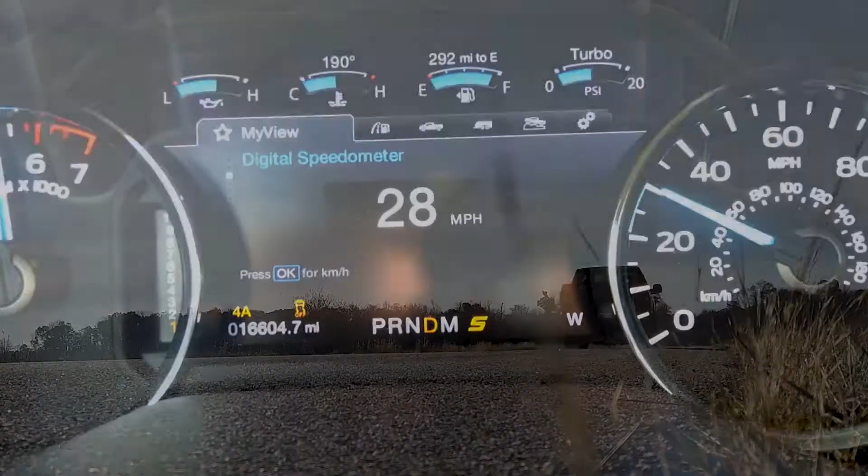Welcome back to the channel. Today we're going to finish the 360 camera mod in the truck. In part 1 and 2 we installed the front camera and the side mirror cameras. Today we're going to wire them all up and make them work.

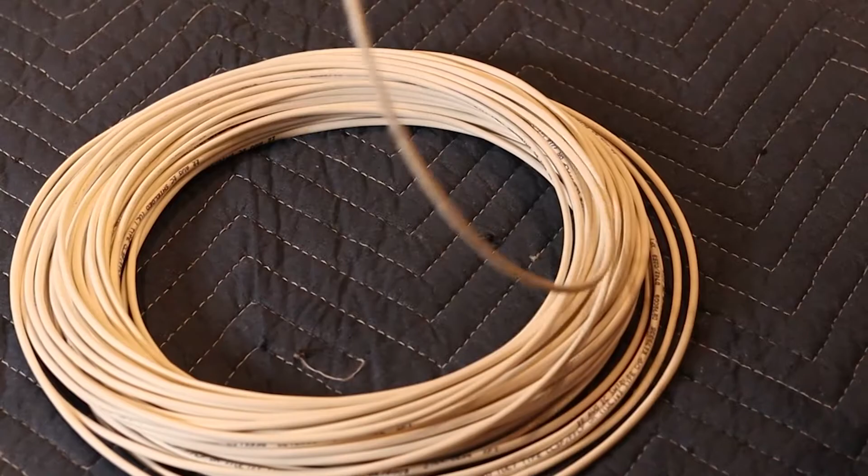We'll start by making the harness that goes inside the dash. Cut one 68-inch and two 58-inch pieces of shielded cable. This harness will connect the two side mirror cameras to the image processing module, or IPMB. It will also connect the front camera to the IPMB via a second wire harness. Under the hood, we will also be fabricating.

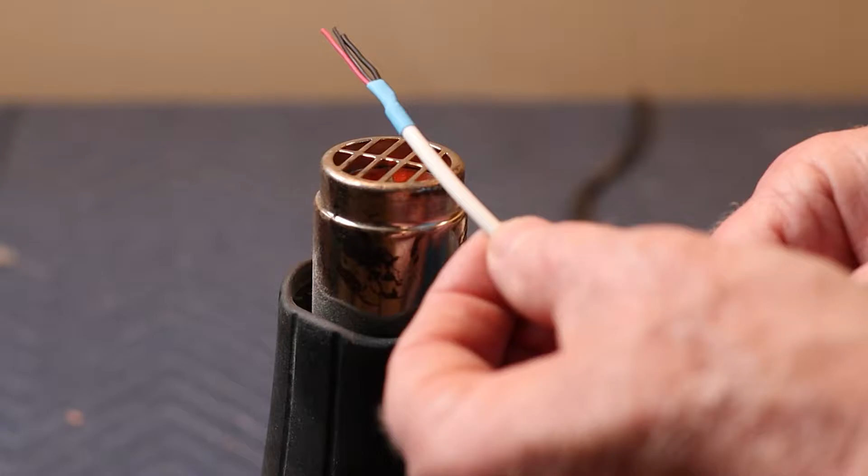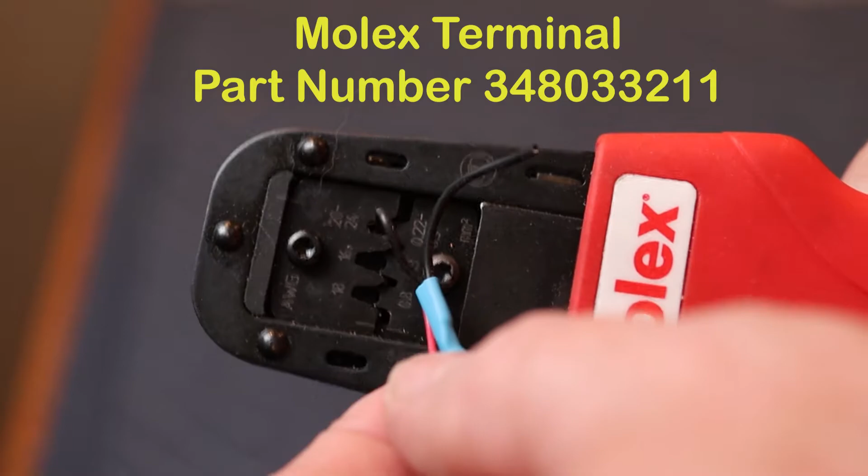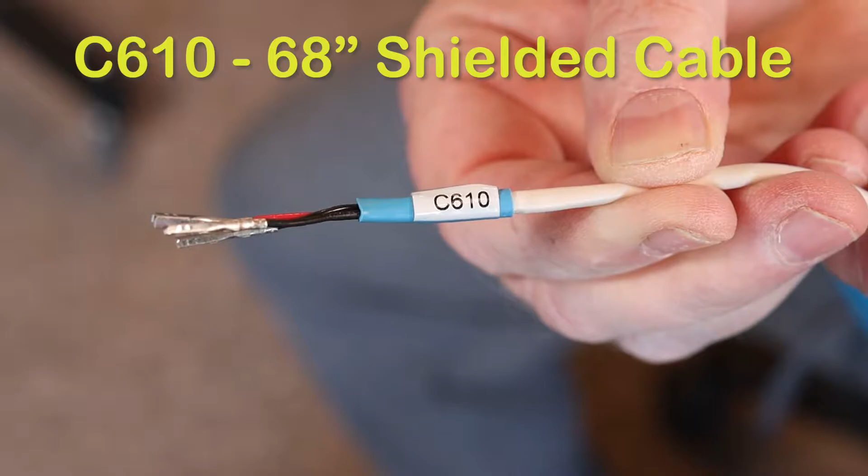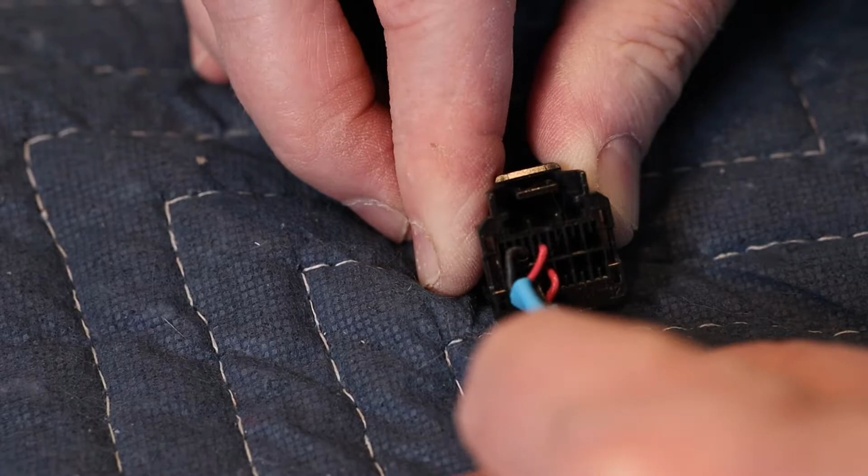Crimp one end of each cable with the terminals shown here. Mark both ends of one of the 58-inch cables C510. Now mark the 68-inch cable C610. And finally, the last 58-inch cable that will connect to the front camera harness, C211.

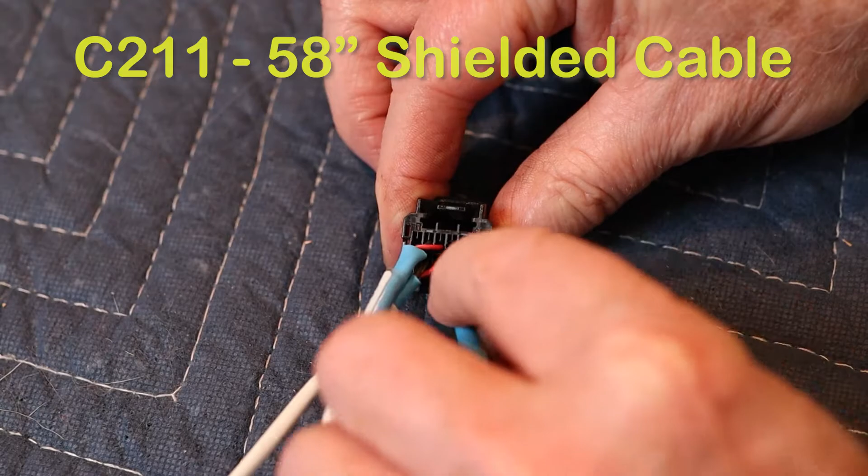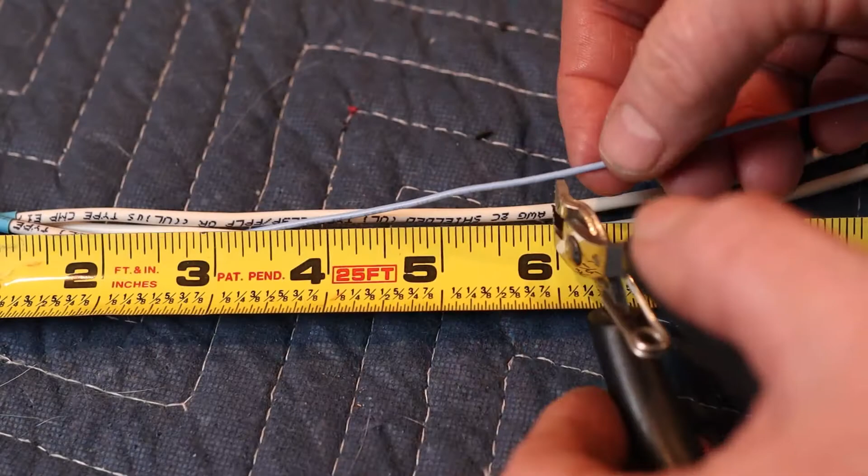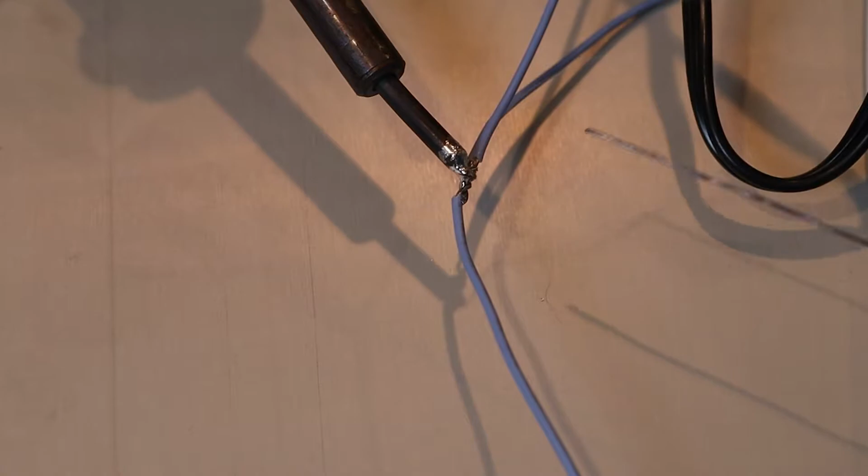Now add a wire that will provide power to both side camera mirrors. At about 6 inches from the connector, split the power wire to run to each mirror. At the opposite end of the cable, crimp each conductor and the shield, and also the two power wires with the terminals shown here.

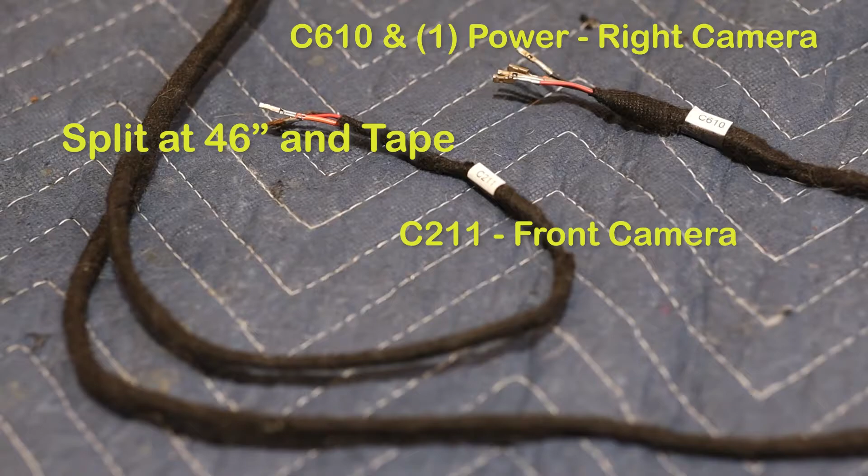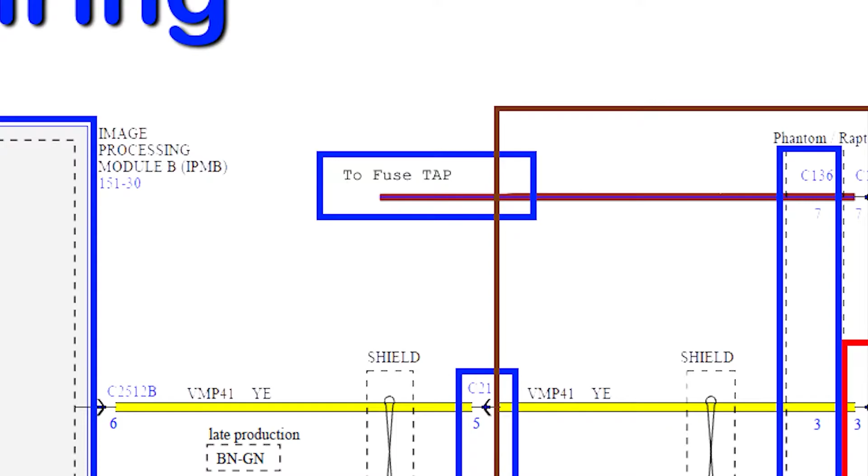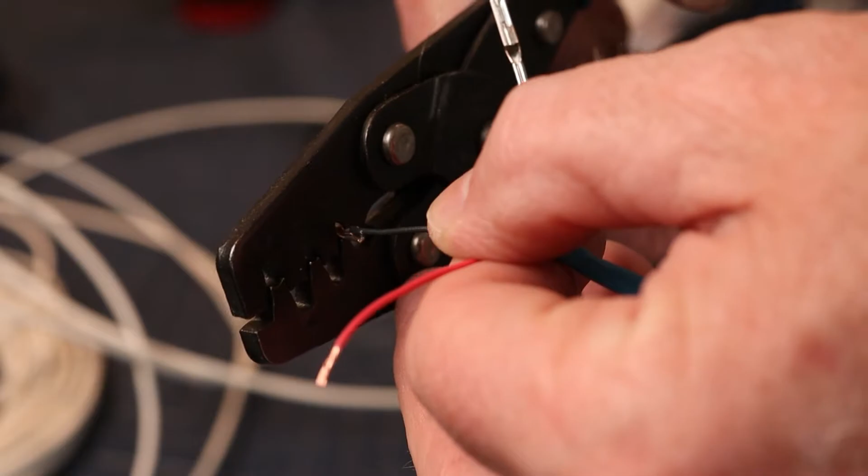My truck wasn't equipped from the factory with any front camera wiring under the hood. This harness will connect the front camera grille harness installed in part 1 to the harness we just finished. The light blue wire will provide power. The brown wire will provide the LIN signal to the camera.

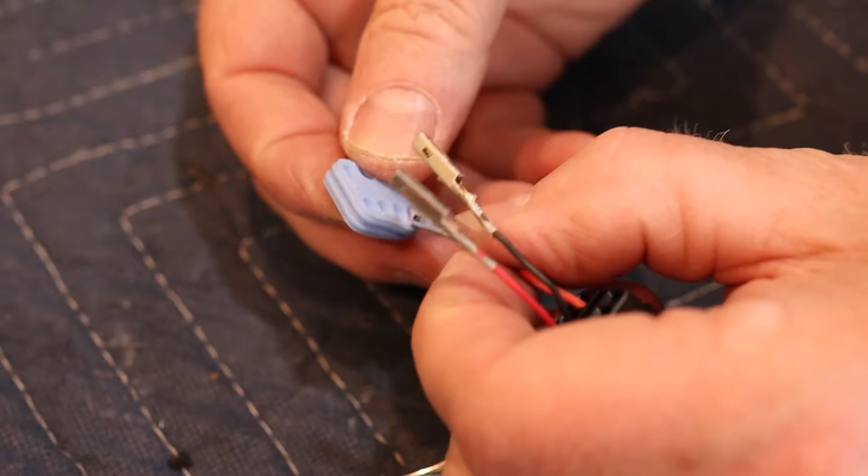Crimp the opposite end of the shielded cable with these pins. For now, we'll be using a fuse tap to provide power to the front camera. We may be revisiting this in the future.

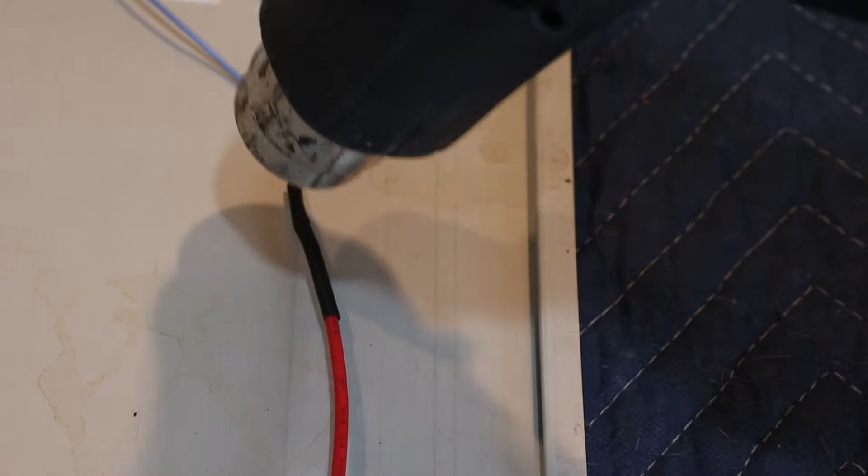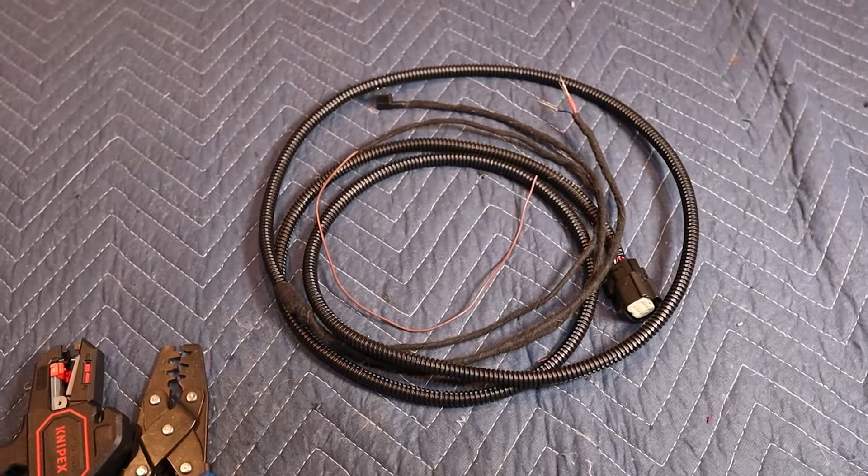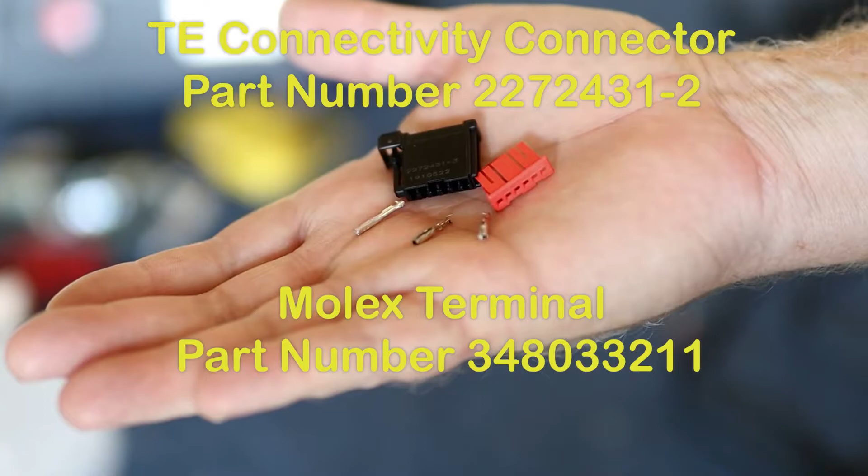Now we need to make a simple harness to connect the camera selector switch to the factory dash harness. Crimp this terminal on the gray wire opposite of the connector.

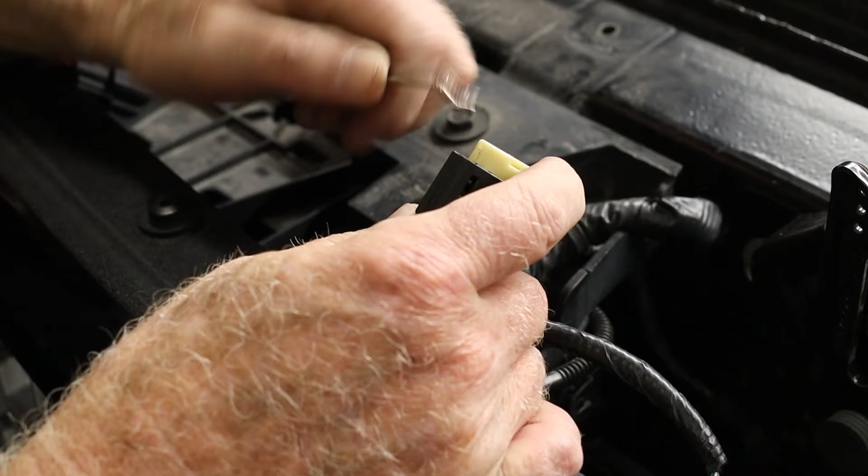Now we'll finally get started installing it in the truck. My truck has the ambient temperature sensor located in the grill, so we have to repin the sensor wires to the front camera harness. Later trucks will have the ambient sensor in the passenger side mirror. This won't be necessary on those trucks.

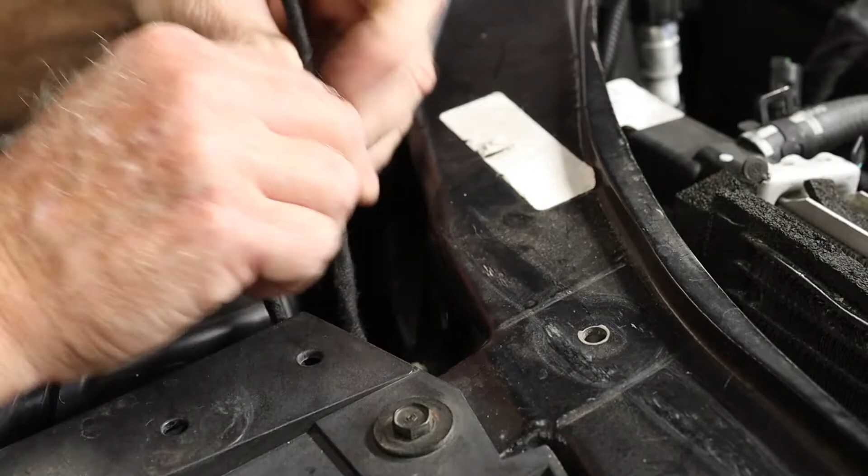Trim back some of the firewall insulation near the battery junction box to expose and remove the rubber grommet. This is where the harness will enter the cab. Also, cut a slit in the grommet and slip it over the harness. This will provide a seal through the firewall.

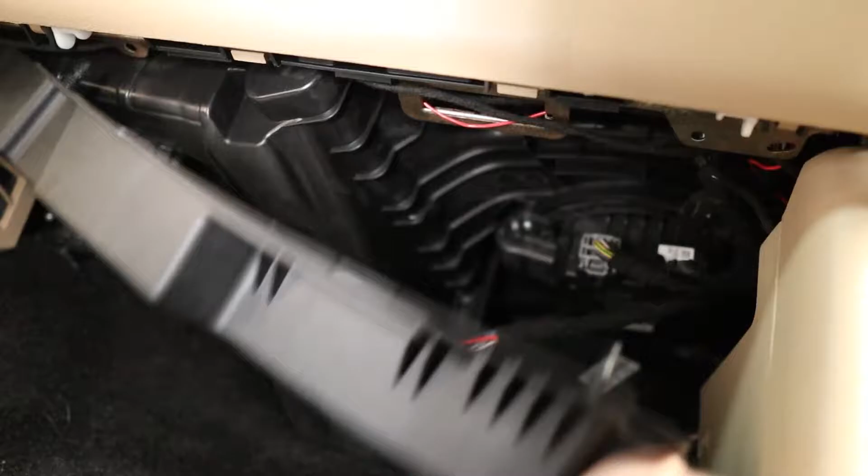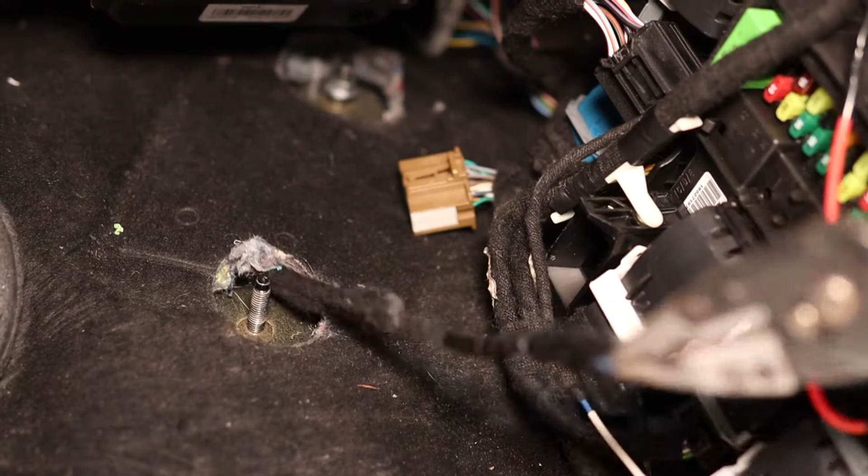Remove the cover under the glove box and peel back the carpet. When fishing the wire through the firewall, it will come out under the 4x4 module. Remove it to gain access. Now reinstall the grommet in the firewall.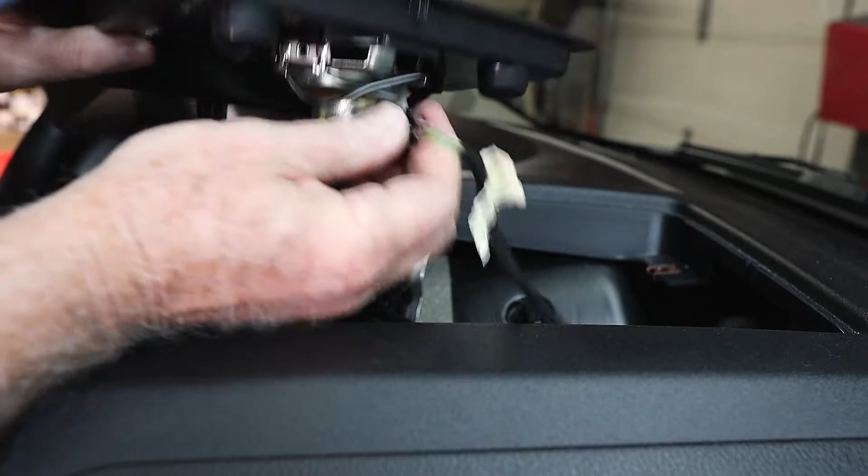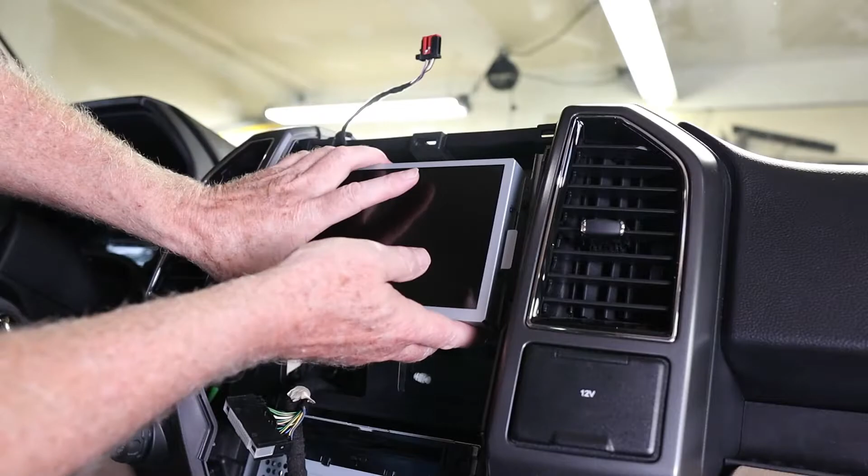Now go back inside the truck and let's start taking apart the center stack. Remove the 2 screws from the top of the front center interface module and gently unsnap it from the dash. Remove the 6 screws that hold in the touchscreen and disconnect the IPMB.

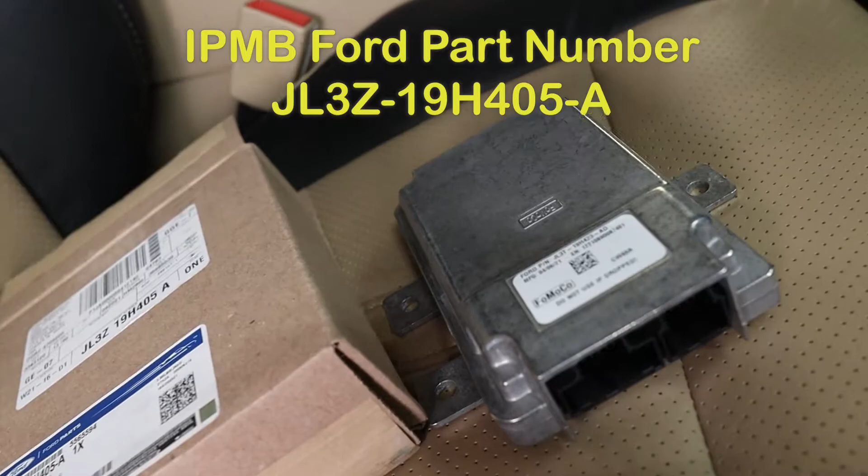My truck is equipped with Pro Trailer Backup Assist, so it has the factory installed rear-only image processing module with only one connector. The 360 image processing module we'll be installing has 2 connectors.

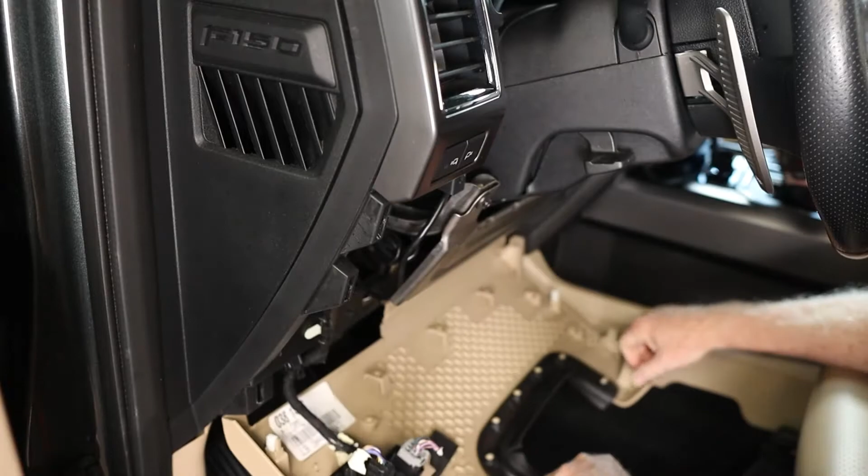Now it's time to connect the driver's side camera located in the mirror. Unsnap the panel under the steering column and remove the brace below it. Unsnap the door wire harness inside the door jamb. I pulled the connector under the dash to gain access to pin the connectors.

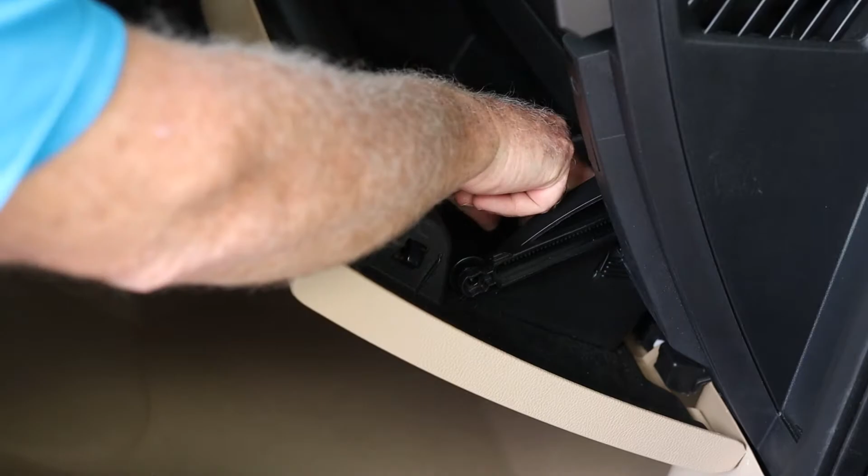Now move to the passenger side and lower the glove box. Inside the dash you will see the middle connector C211. This is where we make the connection between the dash harness and the front camera harness.

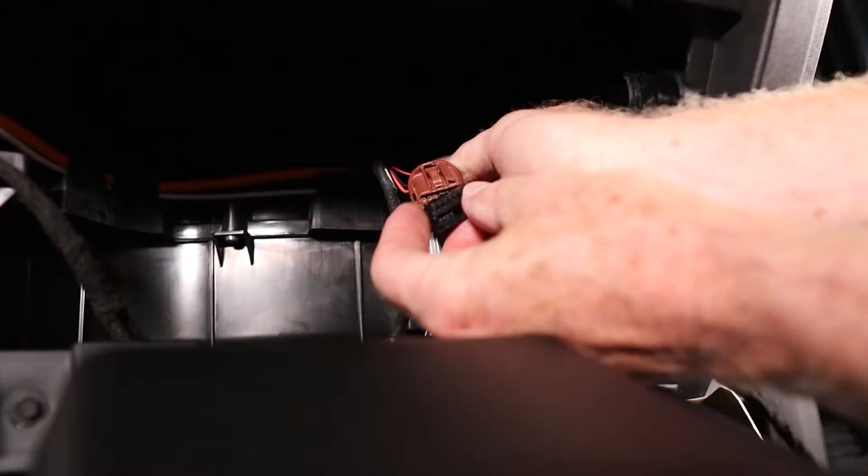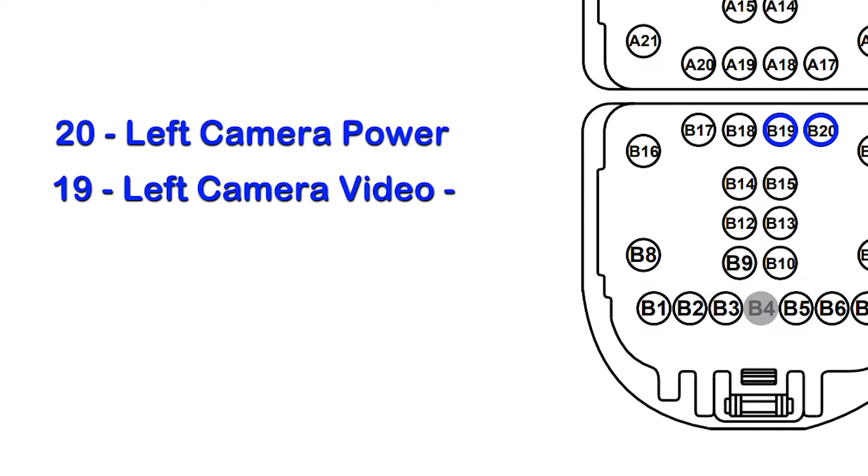And finally, connect the camera located in the right mirror. Now connect the front camera power using a fuse tap. We'll revisit this in a later video with a more permanent solution.

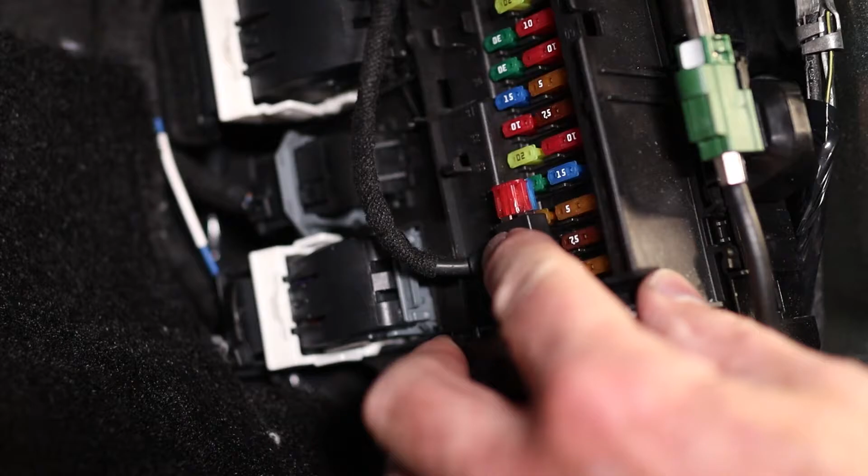Here's an overview on what we're going to do in this section to connect the camera select switch. On my truck, the switch backlighting going to the hazard flasher switch is on the black and purple wire. We'll tap into that for the backlighting for the camera switch.

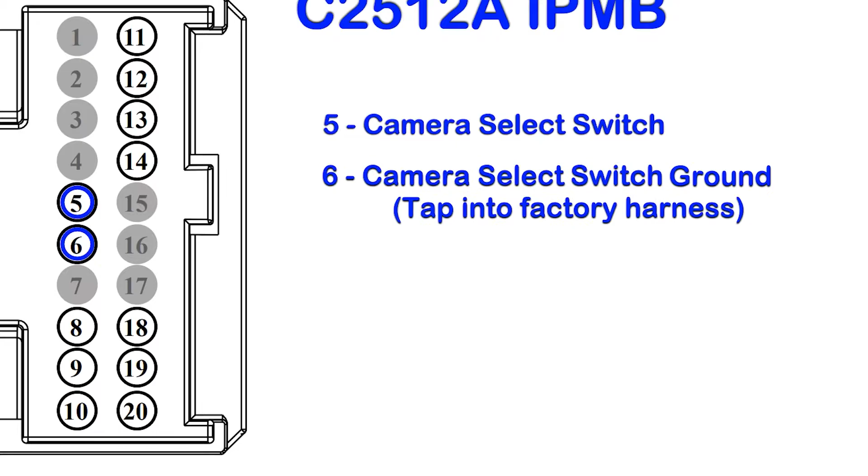Now solder the camera selector switch ground. I tapped into the wire going to pin 6 on the C2512A connector. Now pin the gray camera select switch wire to pin 5 on the C2512A connector. Finally, tap the brown wire from the front camera LIN signal to the white wire going to pin 12 on C2512A. Tape up all the wires with Tesa tape and reassemble the dash.

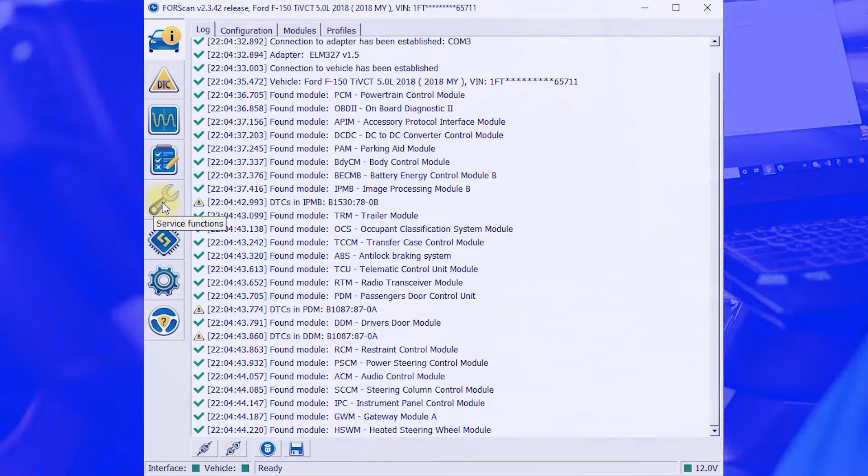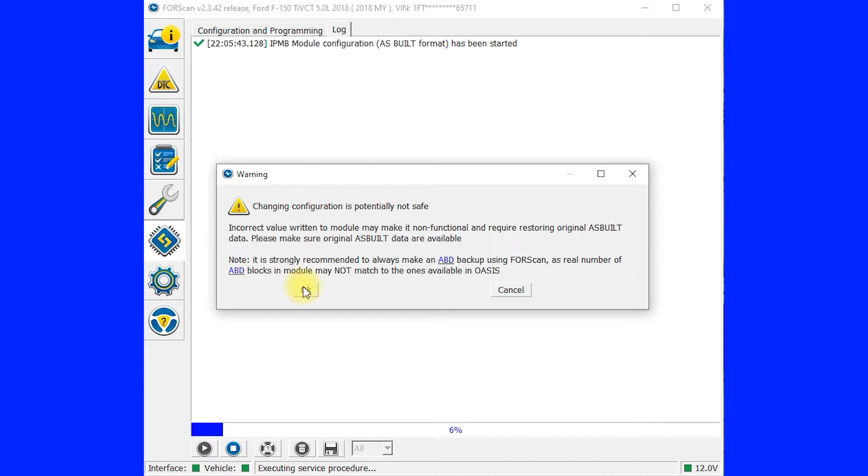Now it's time to make the FORScan changes. After all the modules are detected, run the LIN new module calibration on the IPMB. Here's the as-built data that I used for my IPMB.

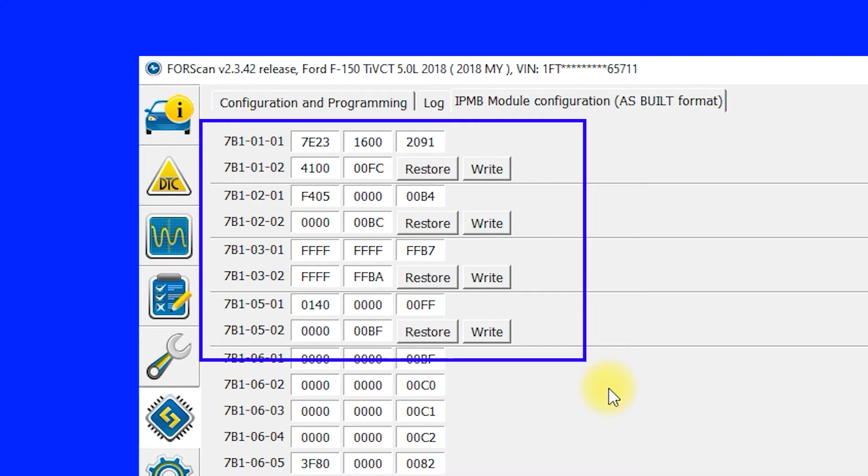At low speeds, activate the front camera in bird's eye view by pressing the camera button on the dash. You can also cycle it to full screen front and wide front view. The rear camera has the same 3 views plus zoom on the hitch.